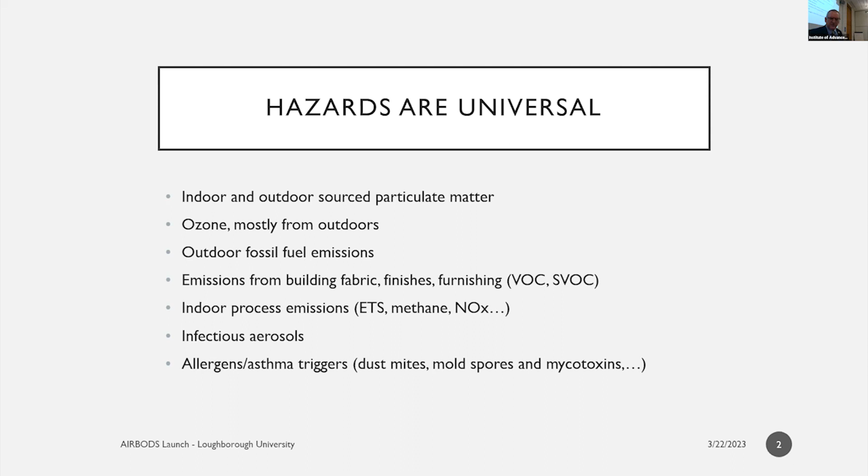So hazards are universal, but risks are local. There's not one single global profile of exposure. We have to look at the environment and understand what's present, and then decide what to do about it. Outdoor air quality varies tremendously from one place to another. Heating and cooking practices, as we heard from Heather yesterday, contribute a lot to both indoor and outdoor pollution. How we build our buildings, what they're made out of, and how we condition them, the HVAC system type, if there is one.

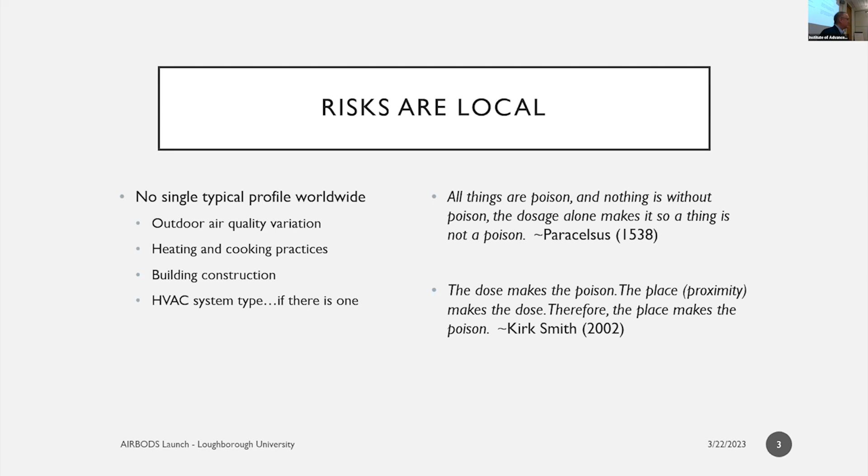I often quote Paracelsus in my indoor air quality lectures, because it makes you sound smart if you quote people from the 16th century. He said, and I'm sure everyone knows, that all things are poison; the dose makes something a poison or not a poison. Kirk Smith very recently said, actually, that the place makes the poison, because where you are determines how exposed you are to things that are present. I think that's a very useful thing to think about when we discuss controls.

I think one of our problems worldwide is the lack of a consensus on what acceptable indoor air quality should be. If you look at ventilation standards the world over, they're all fairly consistent in what they say as a minimum standard. And the main focus is on odor, perceived air quality, subjective impression of air quality. And to that we add typical exposures to contaminants that are present in buildings being below established exposure limits.

So if there's a threshold limit value for something, we're supposed to stay below that. Whether that's good or not is debatable, but it's an attempt to at least prevent high risk of developing diseases over a lifetime that are related to indoor exposures.

So the statement that we use in ASHRAE's ventilation standard is no known contaminants at harmful concentrations as determined by cognizant authorities. So you have to know it's there, and there has to be an authority who's developed the limit, and we actually don't have limits for a lot of contaminants. And infection transmission is not addressed at all in those standards.

And if you really dig into even healthcare standards and talk to the people who write them, they'll tell you that they don't know either, that most of the ventilation rates and the filtration requirements have been handed down from generation to generation because they seem to work. These are not true necessary criteria.

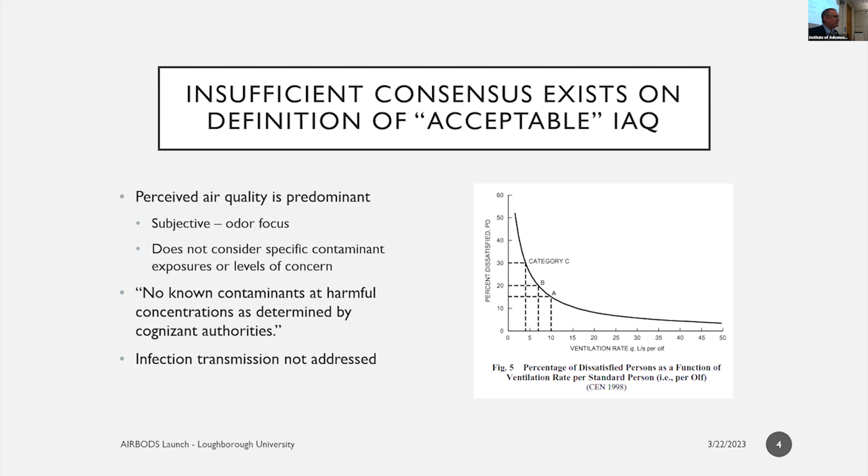And of course, everyone's familiar, I hope, with the curve on the right here that relates ventilation rates to subjective acceptability, which gets us our typical 7.5 liters per second per person in most environments. Our standards are generally prescriptive, not integrated, not based on performance and the overall effect.

So we say you must have a certain amount of outdoor air that's clean enough. That's usually done on the basis of a per occupant amount and a per unit floor area amount, and a minimum filtration level. In some standards, it's not even required under all circumstances. ASHRAE Standard 62.1 only requires filters if you have wetted cooling coils or other wetted airstream surfaces. Most people don't realize that.

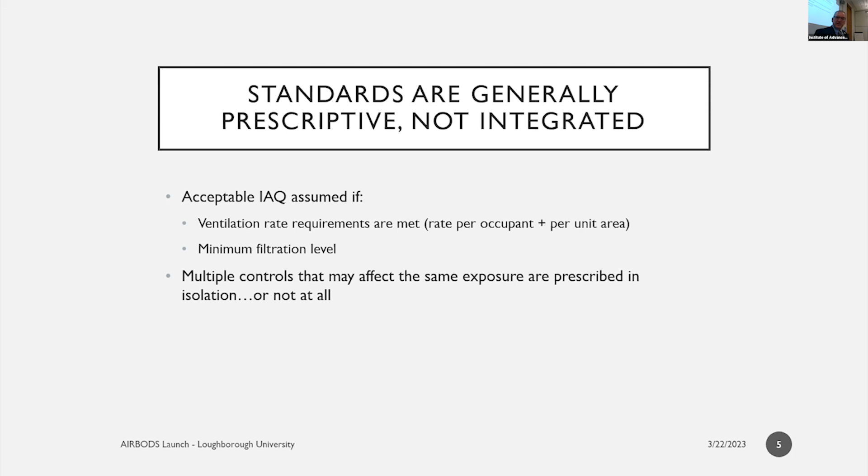So why is that? It's because the filter is there to keep the coil from getting dirty. There is no filtration requirement for recirculated air in these standards that's to reduce the PM exposure of the occupants. So we have multiple controls, but we have no sense of what the cumulative effect is and how we're using those to target a specific type of contaminant, something we can work on.

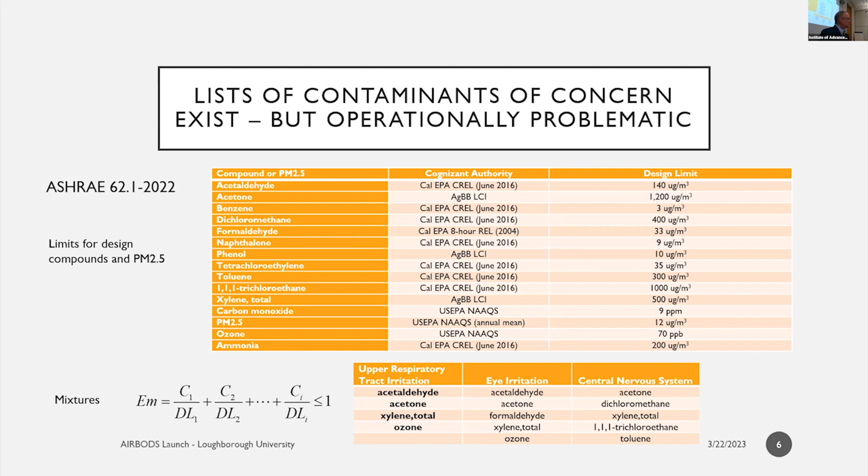We'd like to define air quality in terms of a nice compact set of contaminants that we can measure and control. ASHRAE has been working on its indoor air quality procedure for years, and we've made a good improvement in that recently, in that we now have a specific list of contaminants with levels of concern that have to be met. But the problem is that there are 15 of them, and they're not present in all environments, and some of them are hard to measure. So this is still not a practical definition of indoor air quality.

Another important thing that we need to recognize is that unlike outdoor air, indoor air is rarely regulated at all. In the United States, we have the Environmental Protection Agency, we have the Clean Air Act that has established the National Ambient Air Quality Standards. So outdoors, we've made great progress. Indoors, there's no regulation at all.

If you look around the world, many countries have what are supposed to be indoor air quality standards, but when you look into those, you find out in a place like Singapore, that's often pointed to as a model, that when you ask the government, do we have indoor air quality regulations, they say, no, there are none. This is all voluntary, and we're publishing recommendations, and we know how far those get us in many situations.

Monetizing the impact of indoor air quality is a problem. Monetizing in a certain way, in an actionable way for a particular owner. So there are plenty of studies that show us that there are effects and that they can be very significant in their costs if we look at that across, say, a whole country or across the world. The effect of 7 or 8 million excess deaths from air pollution, for example, or $350 billion a year in the United States from avoidable indoor environmental quality problems.

But what we need to know is if I spend $100,000 more on my building, when am I going to get that money back, if ever? And that would really help us to promote this issue. So we have benefits that we know exist, but they're hard to quantify. We don't have standards that are based on economic analysis.

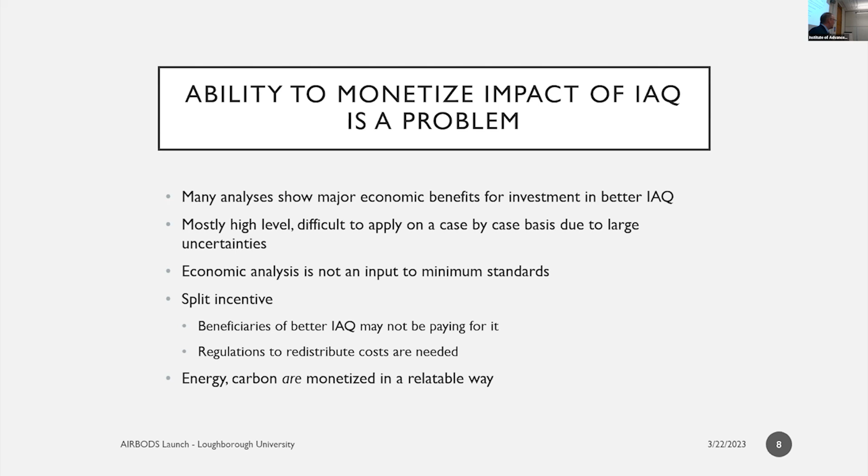Energy and carbon are monetized, and that has always given them more influence when we're looking for ways to spend resources than for air quality. Just to point to both this issue of monetization and differences regionally.

This is a nice piece of work that was done by some Canadian researchers where they looked at the cost benefit in terms of reduced morbidity and mortality from having different levels of filtration using the ASHRAE MERV scale. And what we see is that as you go from 6 to 16, the lowest to the highest efficiency, you get greatly increasing benefits. And the worse the air quality is outdoors, the larger the benefit is.

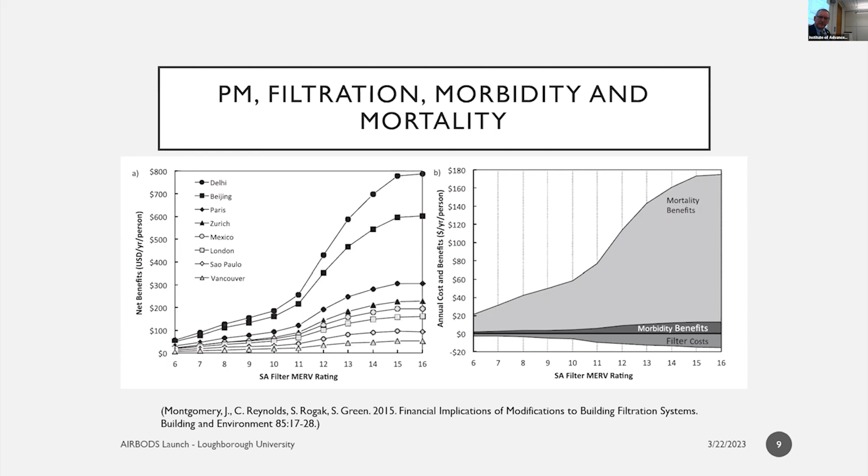I think London is actually in here at the low end, $200 per person per year. That's not bad if you have better filtration in your buildings. So we need to look at things from this way. We haven't really done that at the level of standards and regulations. The best controls need to be tailored to local needs. Ventilation is not always the best.

Ventilation with outdoor air, I think, is sometimes viewed as just a pure benefit, but it's bringing in maybe half or more of the particulate matter in the building. It's bringing in ozone. It's bringing in emissions from outdoor combustion. It adds to the energy cost, which creates more emissions. So it's not the unalloyed benefit that we sometimes think it is. And because many buildings are naturally ventilated, most buildings, the outdoor air supply is unreliable.

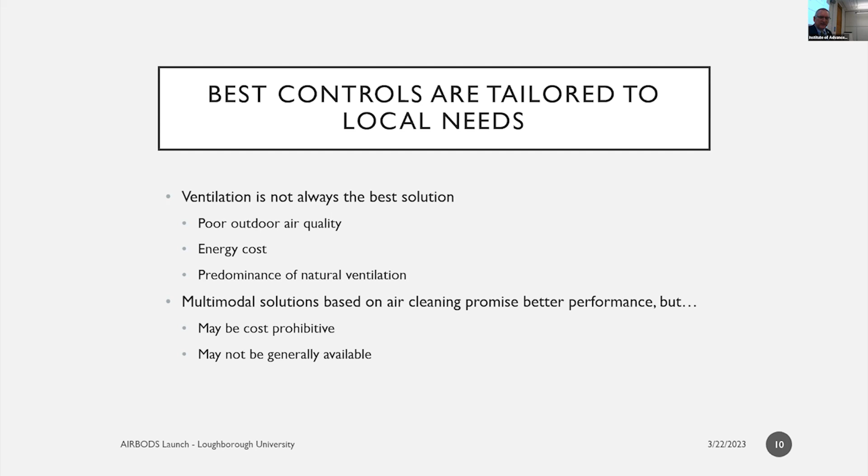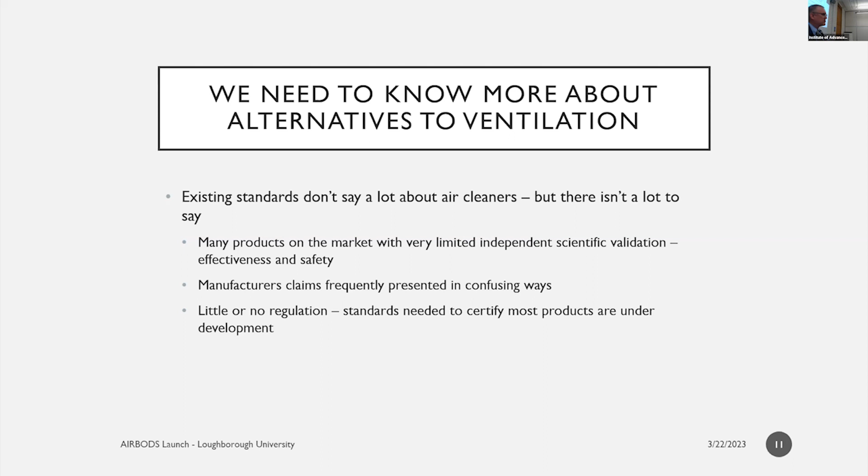So we need multimodal solutions that include air cleaners, but air cleaners are a swamp. There's a lot that we don't know, and they may be expensive to implement. These alternatives need to be studied more. That's one of the main things we're focusing on in our work in ASHRAE these days on standards. There are a lot of products that make claims that aren't backed up by good research. There are not standard test procedures, and there's little or no regulation, certification of products. So all of those things are things that we're working on.

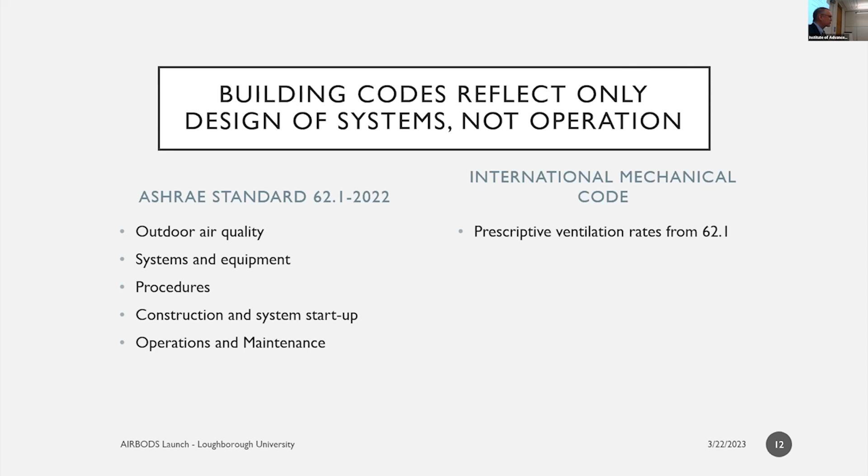We also have the problem that in the construction industry, about the only thing that's regulated is the design of the building. Once the building is finished and occupied, then anything can happen. So ASHRAE Standard 62.1 covers all of the things shown in this list. Is the outdoor air quality adequate? Requirements for systems and equipment design, the ventilation rate procedures that determine the quantities, construction and startup and operation and maintenance. The only thing that makes it into the building code are the prescriptive ventilation rates, and that's pretty typical worldwide again.

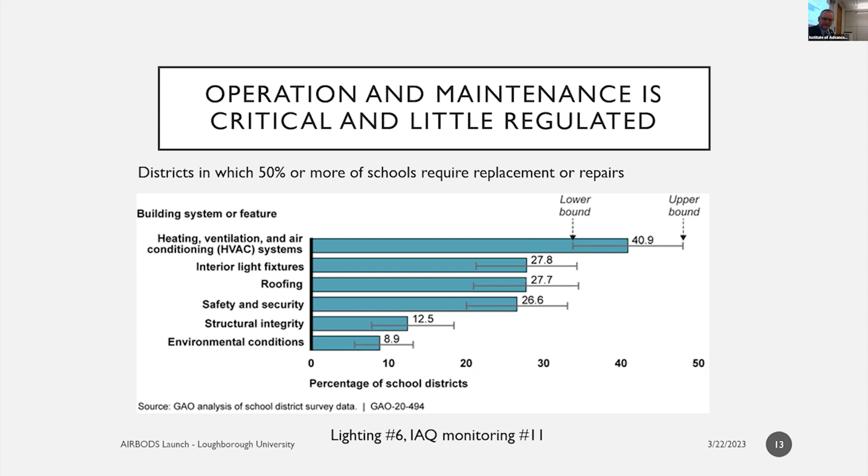And we know that O&M is really important. Even before COVID, the Government Accountability Office in the US did a study of schools, and they found the #1 maintenance item was HVAC systems. 41% of school districts had 50% or more of their systems that were in need of repair or replacement. So this is a significant issue, as Malcolm was noting.

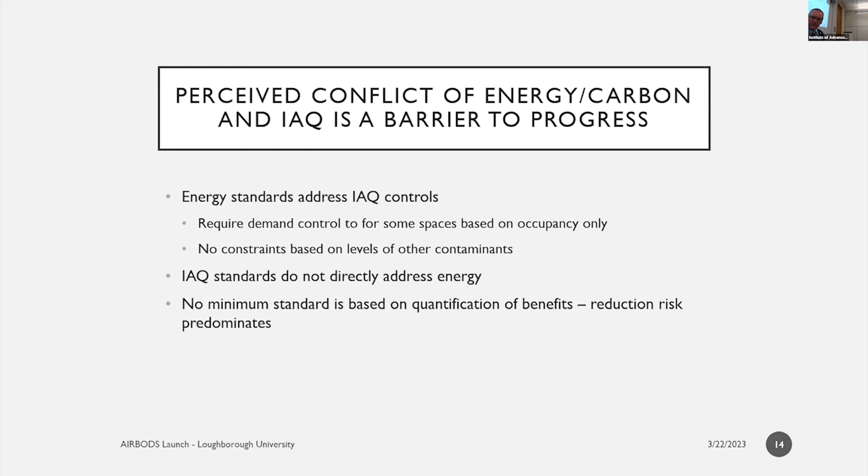And then the perceived conflict between energy/carbon, now we have to say that too, and indoor air quality is a barrier to progress. Every time you say we want to improve indoor air quality, you will immediately get the pushback that, well, isn't that going to increase energy use? And that's a problem. So we need to address these two things together, and that's really the topic of my talk this afternoon.

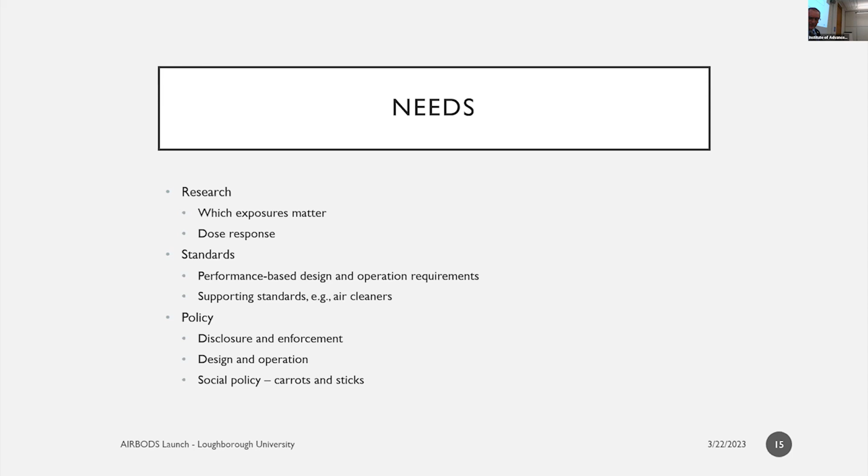What do we need? A lot of research, which exposures matter, more about dose response, standards that are performance-based, and supporting standards that allow us to rate things like the performance of air cleaners. In the policy arena, disclosure and enforcement, that's what you do after design. We need to start having testing of buildings and put air quality certificates on them, just as we are now accustomed to doing with energy. And social policy, carrots and sticks. What are we going to do to incentivize or require that the things that need to be done are done?

And to wrap up, I think that the place we should start is with the precautionary principle. We should take reasonable measures to avoid threats that are serious and plausible. That means sometimes we have to act without perfect knowledge, but we know that the consequences of not acting are severe, as we found out during the pandemic.